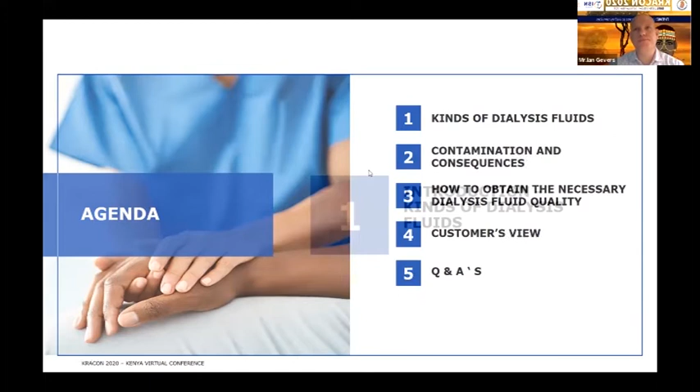In terms of kinds of dialysis fluids, I'm sure you're all very much aware of the types of water quality and water sources that we have, namely groundwater, surface water, well water, and treated water from municipalities.

What is very important to note is that in terms of groundwater, or water in general, there are many contaminants that we must refer to that are found in water sources, namely deposits of salt, gypsum, nutrients, and metals within the soils that leach in from surface and groundwater.

It's very important to understand what these contaminants are in terms of how we then need to treat water in a hemodialysis setting. There are also many factors that influence the water quality and also water sources.

These can be affected also by seasonal fluctuations, which also directly affect microbial and bacterial contaminations.

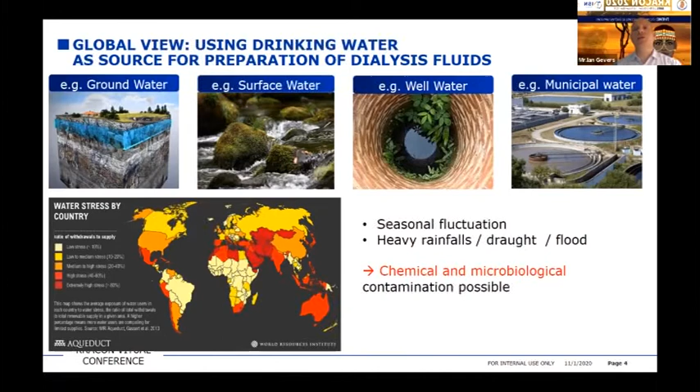What I mean by that is that water enters the water storage containers and leaves directly into the pre-treatment setting, where many contaminants are removed, which actually can be a potential threat to the RO system itself.

We then have the distribution system going to all the dialysis machines and also a concentrate preparation system.

So what's very important to understand about water is the feed water going into a water treatment system in a dialysis unit is of course the heart of it, but also needs to be a water quality that is drinkable.

From that, we can then work with our water pre-treatment system, which removes mostly particles and contaminants which are harmful for the RO membrane.

One could say that you could use an RO system with an RO membrane directly from a raw water feed system, but the risk in that is that you would then go through RO membranes on a very regular basis, and it does definitely pose a risk to dialysis.

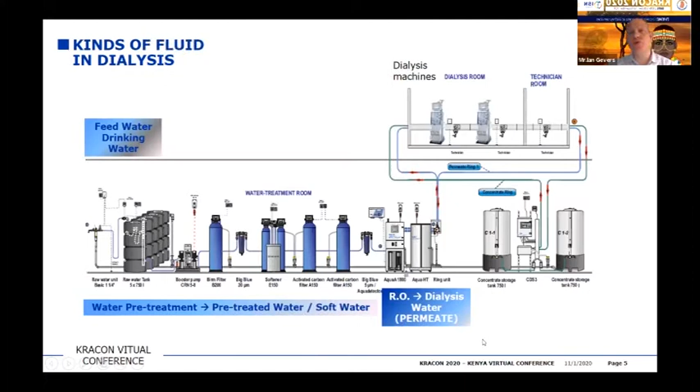We then pass the water through an RO system, and we'll go briefly into the reverse osmosis process in a short while. We refer to this water as permeate.

We then use the permeate to also potentially manufacture concentrates, which could be in the dialysis clinic setting, or they could be the concentrates which you use on a daily basis.

From there, we have dialysis fluid, ultra pure dialysis fluid, and substitution fluid. What's very important to understand is we need to have a set of standards for both microbiological and chemical contaminants.

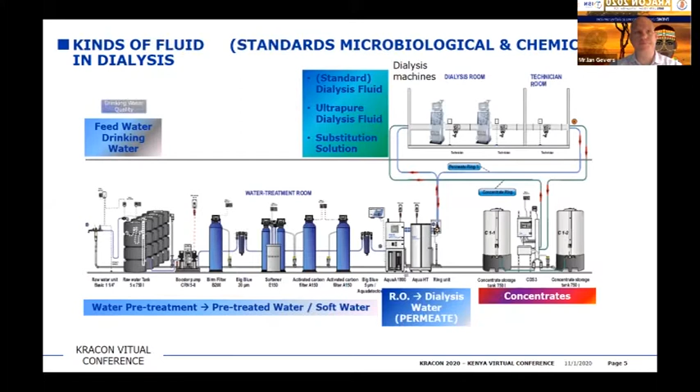So in terms of drinking water quality, what does regulate that water quality? Well, there are various different standards throughout the world. We have the World Health Organization water standards.

In South Africa, we have the South African National Standards for Water. In Kenya, there's the WASREB, the Water Services Regulatory Board, and many other standards in terms of drinking water.

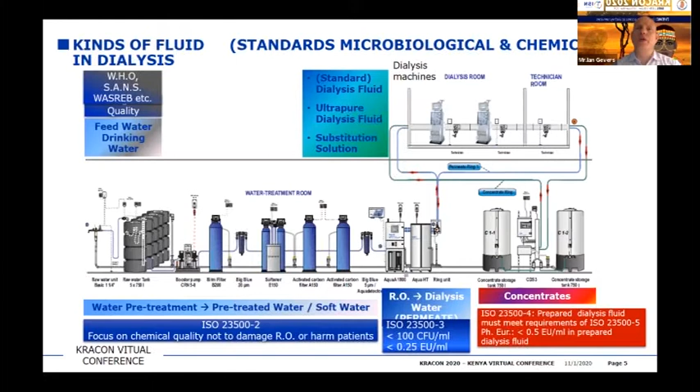However, then we move to a very, very important standard, and that's a standard that has been established over many years and has been consolidated into the ISO 23500 range of water and dialysis fluid preparation guideline.

ISO 23500-2 focuses on the chemical quality, and this is to, as I mentioned before, not harm the RO membrane or harm patients through a chemical contamination.

In terms of RO water for dialysis or permeate, we also then need to regulate the microbial loads on the patient. In other words, as Dr. Miner mentioned, less than 100 colony forming units per milliliter is our limit value, and for endotoxins, 0.25 endotoxins per milliliter.

Of course, there are other guidelines in terms of an action level. So we've got two levels of water quality: an action level and an alarm limit. The action level is what triggers the person monitoring the water system to act before we actually exceed

the alarm limits for bacterial and chemical contamination. We then have ISO 23500-4, the standard for preparation of dialysis fluids, which must meet these requirements. In terms of the European Pharmacopoeia, less than 0.5 endotoxin units per milliliter in prepared

dialysis fluids. We then move to the actual dialysis fluids themselves, regulated by ISO 23500-1 and -5, which has specific bacterial loading limits. We refer to ultra pure dialysate or ultra pure dialysis fluid, and their limits are quite a lot lower, by a factor of less than 100, so 0.1 colony forming units per milliliter, and in terms of endotoxins, 0.03 endotoxins per milliliter. So you can see the regulations are very strict and very stringent.

Moving to the next slide. If we look at a typical RO room or water treatment setup, the heart of the dialysis unit being the RO system, we generally need to break down the reverse osmosis process to understand exactly how the process works. And of course, that eventually leads into the monitoring of the system.

Reverse osmosis is a separation process that uses pressure to force a solvent through a semi-permeable membrane that retains a solute on one side and allows pure solvent to pass through to the other. The RO process uses soft water pressed against the synthetic semi-permeable membrane, which is permeable to water molecules but not impurities. Soft water is pressed with a certain pressure against the membrane, stimulating osmotic pressure. Since larger molecules cannot fit through the pore, only water molecules are pressed through the membrane, and on the other side we then have ultra pure water.

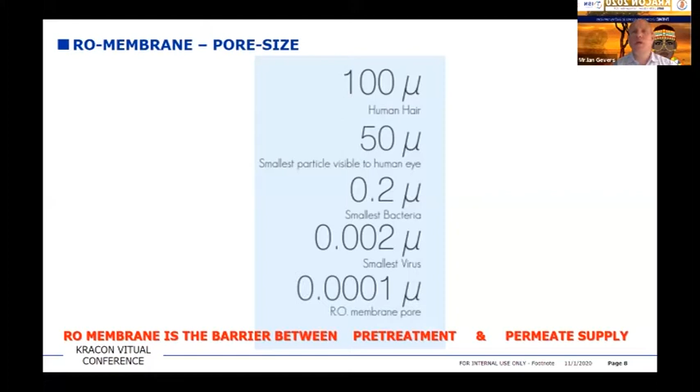So it's very important to note that the RO membrane is the barrier between pre-treatment and permeate supply. If our RO membrane is intact and well managed and maintained, and the integrity of the system is according to specification, we know that we are producing the correct water quality in the system.

However, it's also very important to realize, as I've mentioned numerous times, that monitoring of the water treatment system is an extremely important factor. To ensure the safety of the system, there should be certain monitoring parameters in place, for example daily, weekly, monthly, and annual monitoring.

This relates to the pre-treatment in daily and weekly monitoring, where we're monitoring chlorine, hardness, pressures, tank volumes, backwash of controllers, and salt levels in the softener, as well as the RO performance.

Maybe just a quick comment about chlorine. Chlorine is very harmful, resulting in hemolysis of the red blood cells in a dialysis patient, thereby dropping the HB, and this can affect an entire dialysis session. So it's critical to monitor chlorine before every dialysis session, depending on the type of pre-treatment in place. A double carbon filter would allow you to monitor chlorine before dialysis starts, and it's very important that before dialysis starts, someone with the correct knowledge and training should evaluate the system,

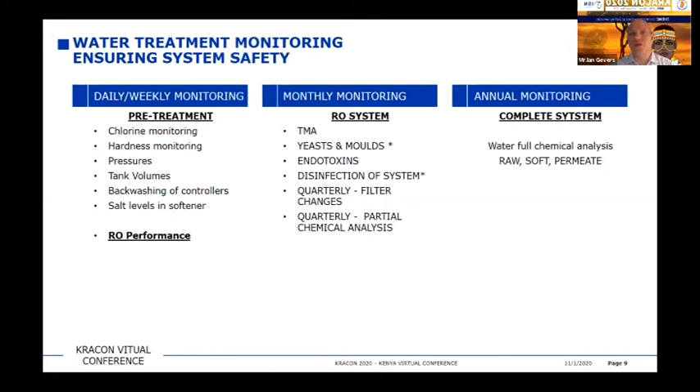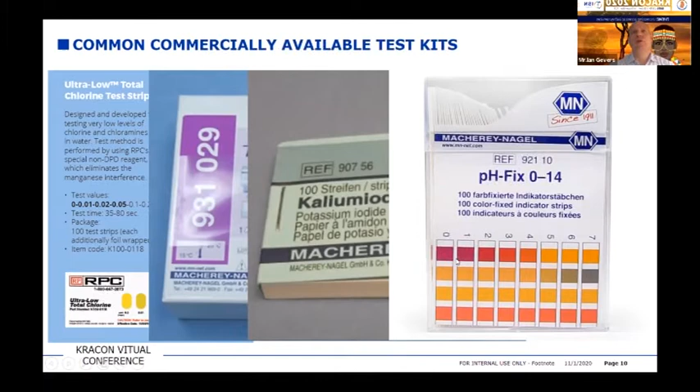So how do we do the daily monitoring of water treatment systems? There are commercially available test kits that you can use to monitor chlorine, hardness, in terms of disinfection, iodide, potassium strips, as well as monitoring pH of a system. It's critical to monitor these systems daily and have these test kits available in a dialysis clinic water treatment system, to ensure that our patients are dialyzed safely from the word go.

So we mentioned ultra pure dialysate before, and dovetailing on Dr. Miner, online HDF, what has been identified over the last 5 to 10 years, possibly even longer, is minimizing the patient's risk of cardiovascular morbidity and mortality. So despite significant improvements in the quality and efficacy of hemodialysis therapies in recent years, CVD remains the leading cause of death for dialysis patients.

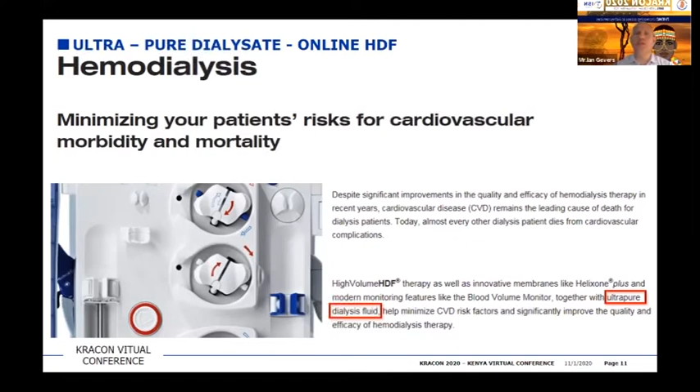Today, almost every other dialysis patient dies from cardiovascular complications, and it's very important then to make use of ultra pure dialysate fluid with features on devices such as blood volume monitoring, in order to help minimize cardiovascular disease risk factors and significantly improve the quality and efficacy of hemodialysis therapies.

So why ultra pure dialysate fluid? Well, patients treated with ultra pure or ultra filtered dialysis fluid have demonstrated a decrease in serum beta-2 microglobulin concentrations, a decrease in markers of an inflammatory response and oxidant stress, and an increase in responsiveness to erythropoietin.

In long-term studies, the use of ultra-filtered dialysis fluids have been associated with a decrease in incidence of beta-2 microglobulin associated amyloidosis, better preservation of residual renal function, and improved nutritional status, which Dr. Tuahir commented on quite a lot, as well as Dr. Miner. These observations have led to the recommendation that dialysis fluid of higher microbiological quality, so-called ultra-pure dialysis fluid, should be used for routine hemodialysis.

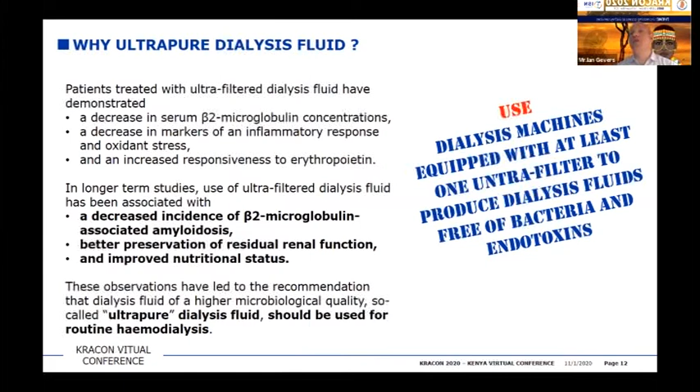The use of hemodialysis machines, therefore, should at least be equipped with one ultrafilter to produce these dialysis fluids free of bacteria and endotoxins.

Additionally, in terms of online hemodiafiltration, online prepared sterile and non-pyrogenic fluids is required, especially due to the direct infusion of high volumes of fluid into the patient's bloodstream. Therefore, it is of particular importance to ensure that no contaminants, chemical, bacterial, or otherwise, may occur in dialysis fluids.

So if we have a look at the contaminants and consequences associated with pre-treatment and dialysis water, from a chemical perspective, with pre-treatment we're removing certain parameters to protect the integrity of our RO membrane, which is the barrier between our water supply system and our patient's dialysis water quality.

And then from a dialysis water quality or reverse osmosis system, other contaminants are in the blue categories. I'm not going to go through each and every single contaminant, as that would take a very long time, but we can mention a few which have specifically been documented with toxicity in dialysis, those in red or orange: aluminium, fluorides, lead, nitrates, nitrites, sulfates, and zinc.

But generally, of course, we need to remove or control all contaminants to a very specific level of quality associated with the ISO 23500 water standard.

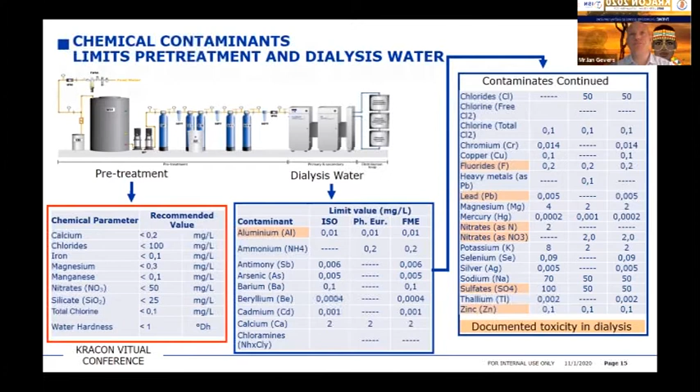Coming then to the bacteriological contaminants, if we look at total bacteria or plate count, you can typically see the growth on a media to indicate the growth rates and bacteria present in water.

What is a very interesting point to mention at this point is that growing bacteria on plate counts can also identify yeast and molds. By identifying yeast and molds on the same plate count, it can then be determined whether one should or should not perform yeast and molds as a diagnostic test rather than on a monthly test. We also then have endotoxins as a contamination.

And all of these contaminants left untreated in a water treatment system can lead to growth of biofilm. Biofilm is, fancy words aside, a polysaccharide or specific structure that occurs within a pipeline distribution system within a water treatment system. But basically what we're looking at is a slime that forms within a pipeline where bacteria adheres to the inner walls of the pipeline.

This proliferates and grows and eventually forms a protective mucus around the bacterial growth on the inner lines of the pipes, which can then lead to, after disinfection, a dispersal. This immediately creates a risk for a patient because those dispersals or break-offs can then go directly into the dialysis machine, posing an immediate risk of biological contamination to the patient.

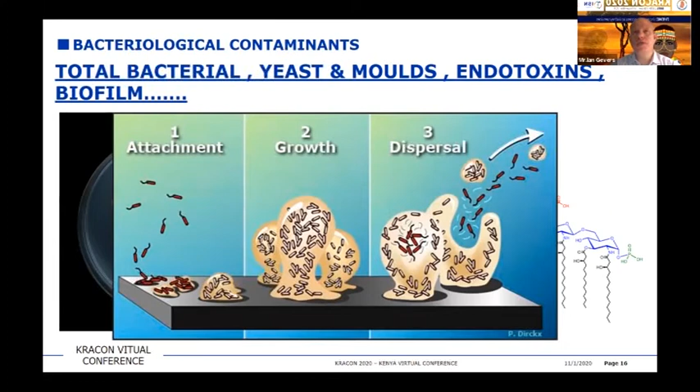So if we break down what endotoxins are, they're basically found in the wall lining of a gram-negative bacteria. It's a lipopolysaccharide protein complex. They are often released during the proliferation, lysis, or breakdown of the bacteria found within a dialysis water treatment system. And the risk here is that smaller parts may pass a dialyzer membrane and cause reactions to patients, specifically the lipid A string of the bacteria or endotoxin.

So how do we test for bacteria? How do we test for endotoxins? Well, typically we have laboratories available throughout the world. Of course, there are laboratories in Kenya, South Africa, and neighboring countries which perform these tests. And this is the most common practice, but it does have lengthy time delays, specifically related to endotoxins.

The standard test procedure for a typical plate count is 7 days. However, one can have a preliminary result within 2 to 3 days, which does give an indication of whether bacteria is proliferating or not.

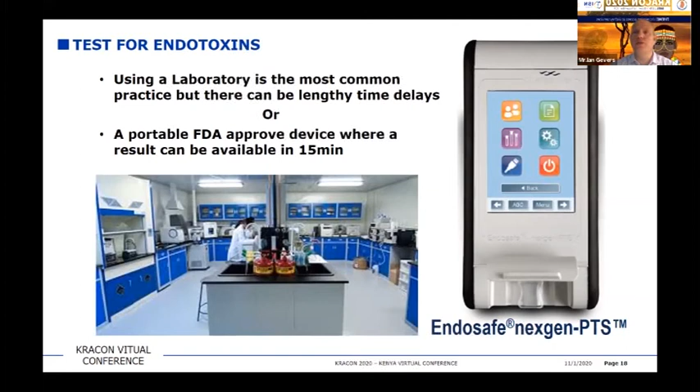The other method for testing endotoxins is a portable FDA-approved device where you can actually get your endotoxin results within 15 minutes. These systems are available through various different suppliers. In South Africa, we specifically use the Endosafe nexgen-PTS device, and it's definitely an opportunity worth investigating.

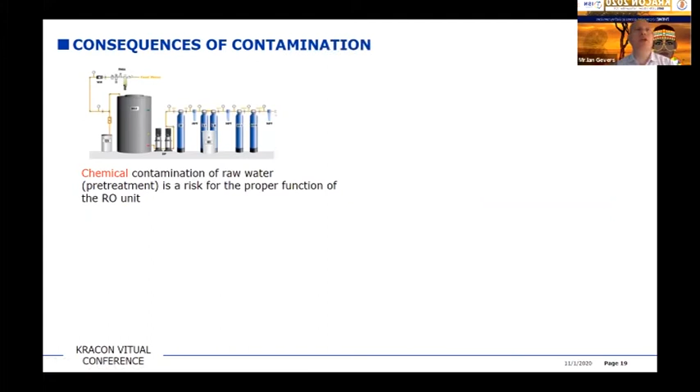So consequences of contamination - I think Dr. Miner mentioned this very briefly, but let's go into it in a little bit more detail.

The most risky elements in terms of our pre-treatment system are the chlorine, nitrates, calcium, and magnesium. And typically what happens here is that, as we mentioned before, the RO membrane is the barrier between pre-treatment and the patient, or the permeate supply. So what happens is the RO membrane will block most of the contaminants, bar chlorine.

Chlorine does move through the RO membrane, and that is why it's critical to remove chlorine before the RO membranes through carbon filtration, as an example. If not, it damages the RO membranes. And the risk here is that we have passages of substances where these contaminants can then move directly through the RO membrane.

A softener is also very important regarding the protection of the RO membrane. If we do not have a softener which removes calcium and magnesium through an ion exchange process, we can actually block up our membranes, which can result in a rupture of the membrane.

From a chemical and microbial contamination risk in dialysis fluids, there are, of course, acute and chronic adverse effects. When we speak about different contaminants such as nitrates and chlorine, this can cause hemolysis. Bacteria results in a biofilm formation in the system. This can increase the endotoxin concentration. An example of this would be after a membrane rupture, thus leading to sepsis in a dialysis patient.

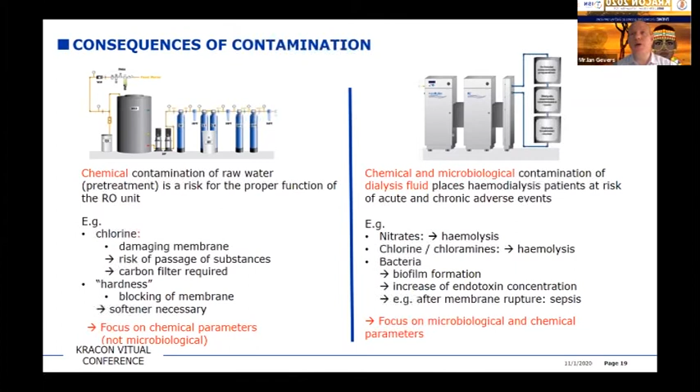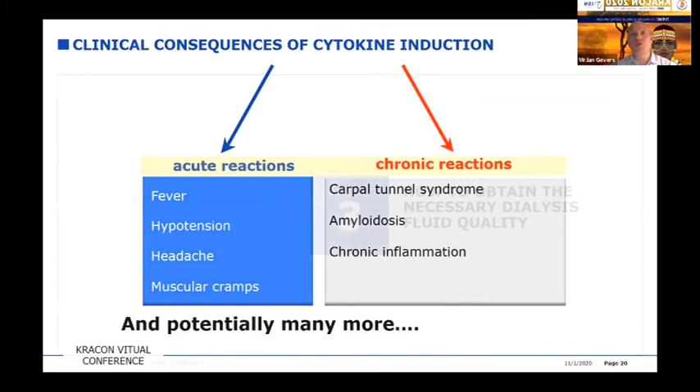Of course, we could spend probably a day going into the amount of reactions in a patient, but let's focus on how we can manage the system and therefore create an online substitution fluid of the correct quality.

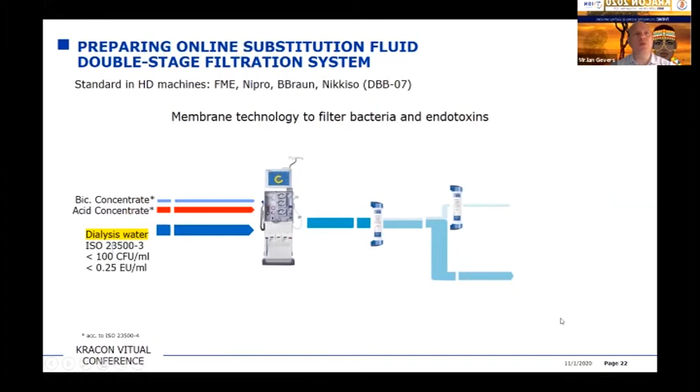So if we have a look at a typical dialysis machine, most dialysis machines these days do have an ultra pure bacterial filter in place. And if we look at the fluids that actually come into a dialysis machine, we've got the concentrates as well as the dialysis water with a very specific quality, as we've already identified.

The machine mixes these fluids and results in a standard dialysis fluid, which we would use for a treatment, typically hemodialysis or hemofiltration, etc. Here we've got also a very specific standard in terms of bacteria limits.

And then in terms of creating ultra-pure dialysis fluid, we should pass our dialysate through an ultra-fine or ultra-pure filter. This results in a bacterial count of less than 0.1 colony forming units per milliliter, and 0.03 endotoxin units per milliliter. The idea behind an ultra-pure filter is that it has a property of 99% rejection or retention of bacteria and endotoxins.

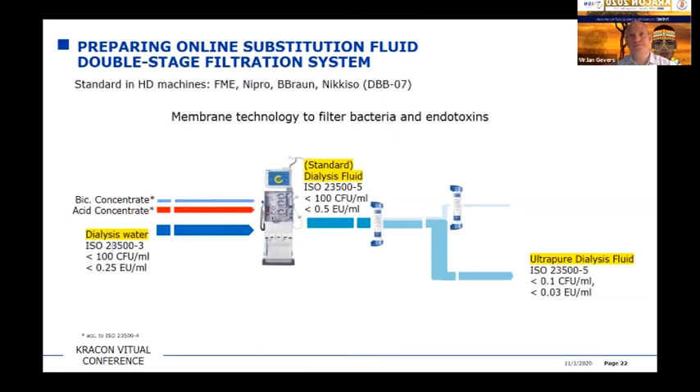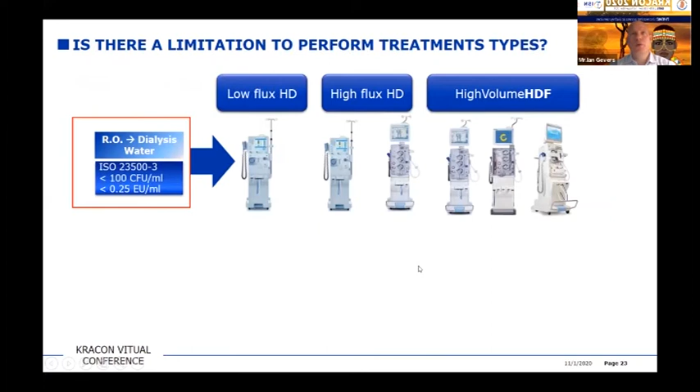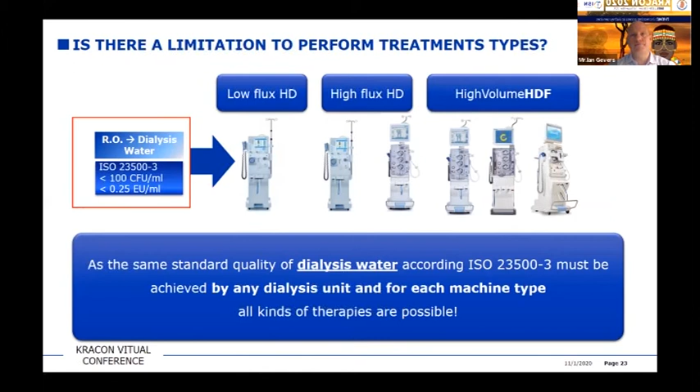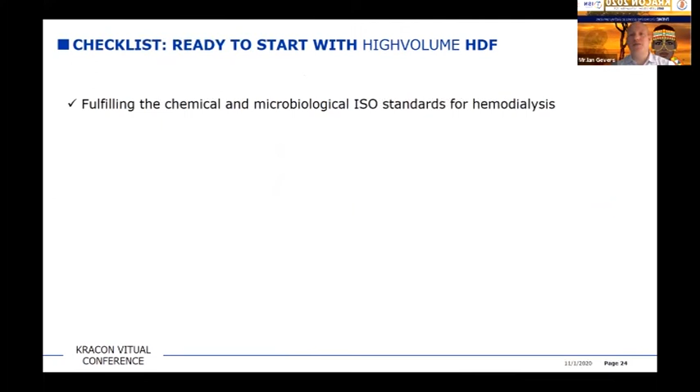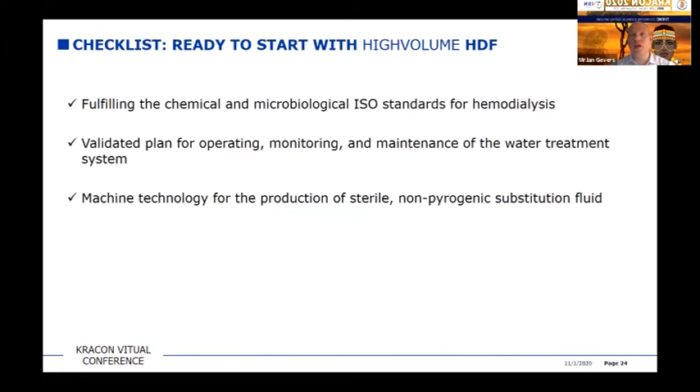So are we ready for hemodiafiltration yet? Well, we have to fulfill the chemical and microbial ISO standards for hemodialysis. We have to have a validation plan for operating, monitoring, and maintaining water treatment systems. And we have to maintain the technology for the production of sterile, non-pyrogenic substitution fluid.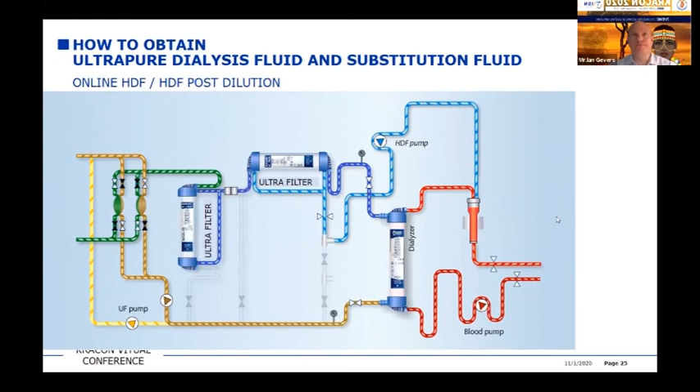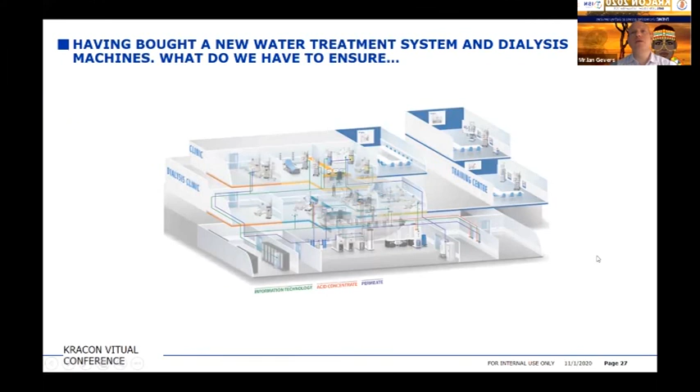So if we break it down and have a look at it in terms of the customer's view, let's assume we placed a completely new water treatment system at the site of a dialysis clinic. We can then look at what's important for the customer to have as a support structure: technical availability, chemical quality, microbial quality, and of course regulatory compliance in terms of ensuring patient safety.

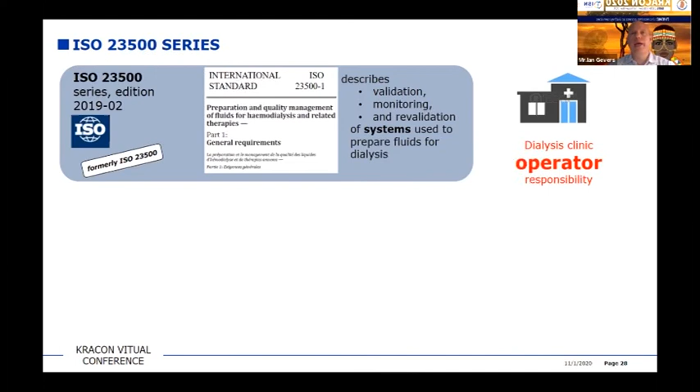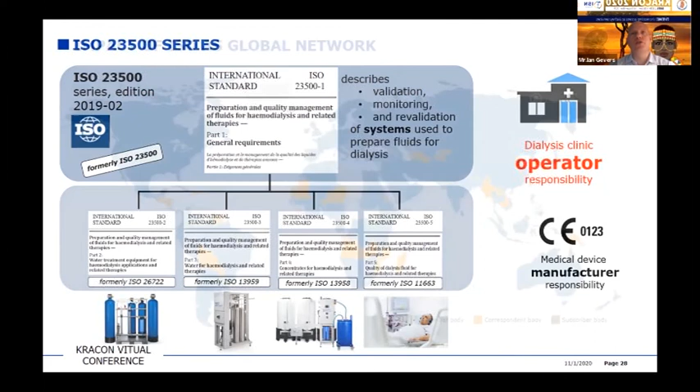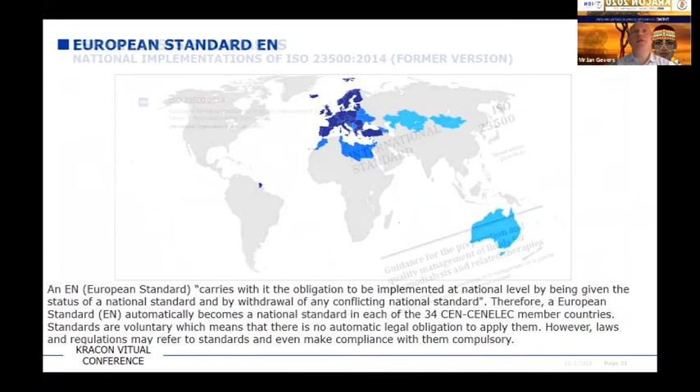In terms of identifying responsibilities in the different systems, it's important to understand that the operator in the dialysis clinic has a function to monitor the systems. In terms of design, the manufacturer has a responsibility to ensure these devices are manufactured according to standards. The impact of ISO is based on a global network, as well as European standards, and all the standards set out for dialysis have been concluded and summarized in the ISO 23500 standard.

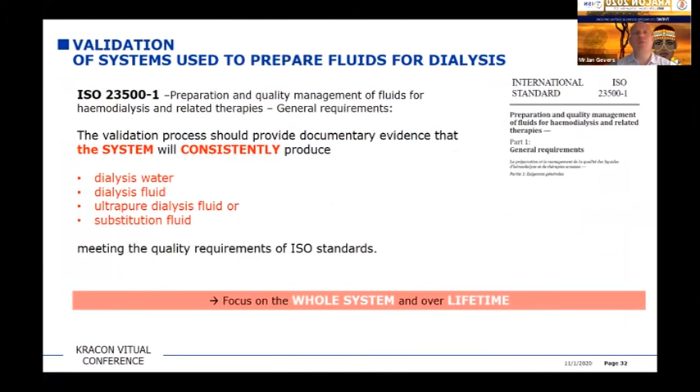Moving on to validation of the system, there must be a plan in place. We must focus on the whole system over the lifetime of the device to ensure correct quality and meet the correct standards. The validation and surveillance of the system is very important, and there are different qualification processes that must be in place for the manufacturer as well as for the user.

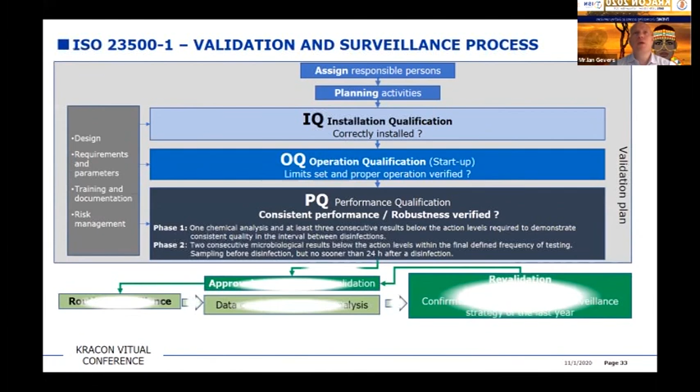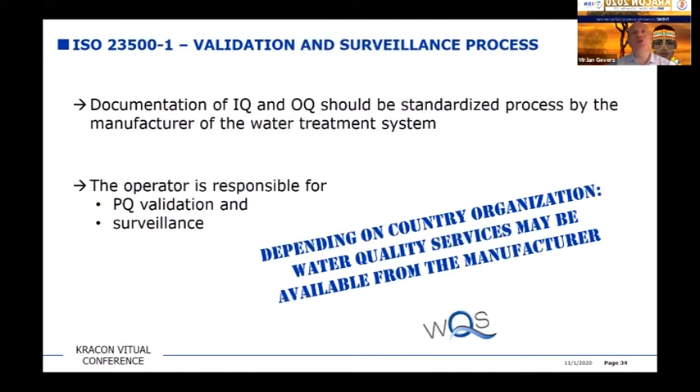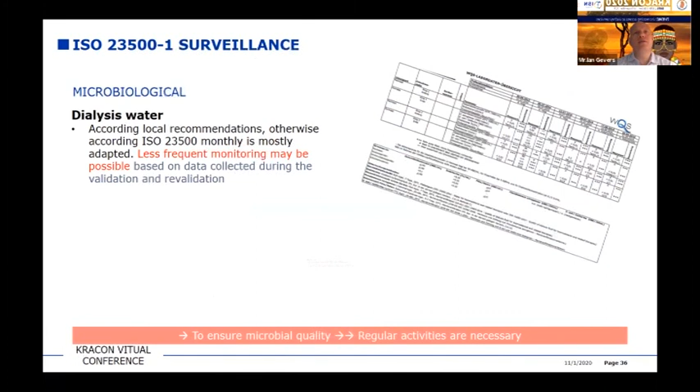It's very important to have a surveillance system with monthly performance monitoring, and your water treatment supplier can assist you with putting a plan in place. In terms of validation, it's important to have operational qualification, microbial qualification, as well as chemical qualification processes in place.

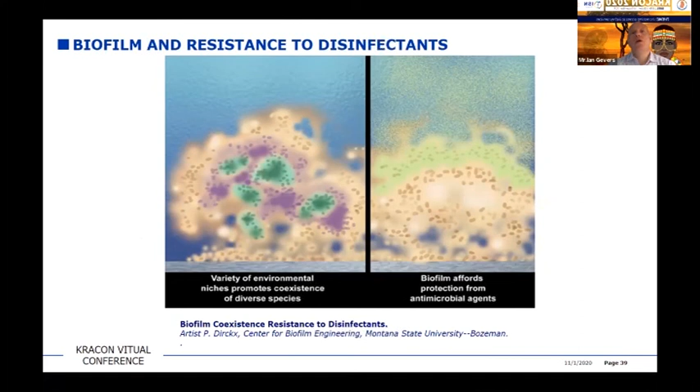Coming to the last and a very important strategy of a water treatment system, biofilm is a clear risk for dialysis contamination after the RO membrane, and biofilms can become resistant to disinfectants. So it's important to control it before it actually forms.

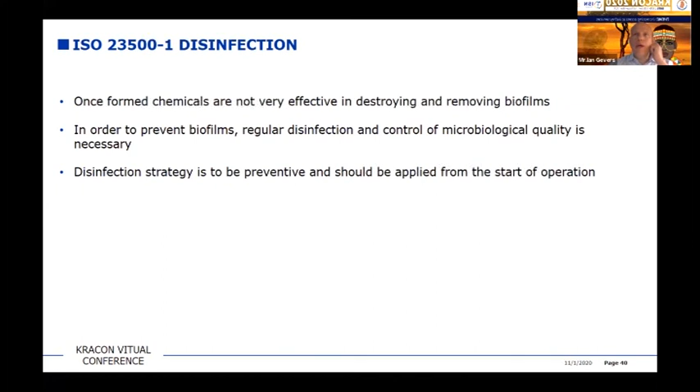If we look at the disinfection strategy of a water treatment system, it must be regular to control bacterial contamination. A disinfection strategy should be preventative rather than reactive.

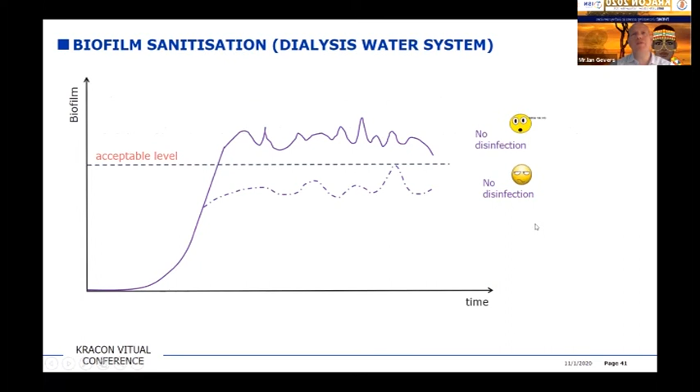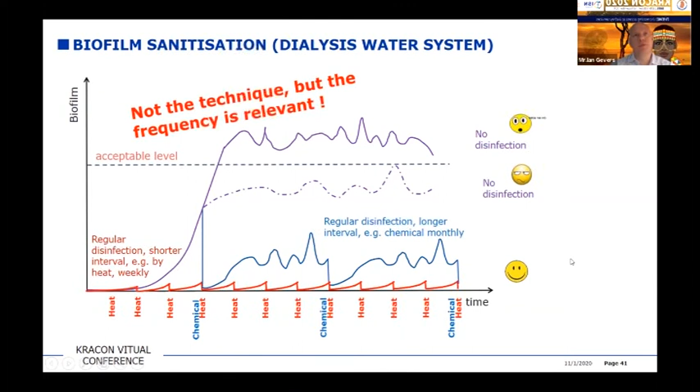How can we define this graphically? Biofilm grows over time. If we don't perform disinfections, we have steady growth, eventually logarithmic growth of bacteria above acceptable levels. However, with a standard regular disinfection process in place, for example monthly, we can control the proliferation of bacteria and biofilm. And with a heat disinfection system in place on a weekly basis, it provides further and more accurate control of bacterial contamination. So it's not so much the technique, but rather the frequency that is relevant.

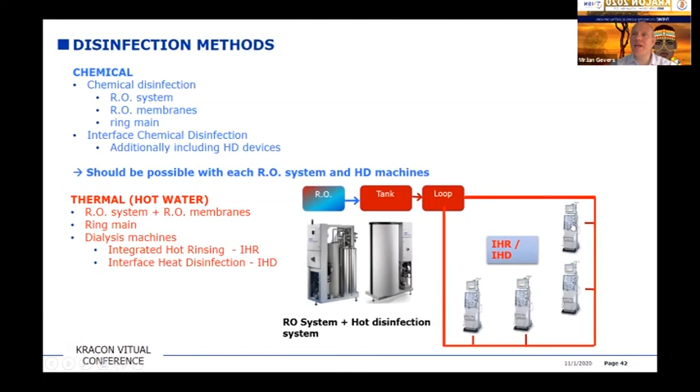Our disinfection methods can relate to the RO system, the RO membranes, as well as the ring main. It's also important to understand the risk on the water inlet circuits of dialysis machines, which are often not disinfected. So it's important that your disinfection systems include the piping systems that go to the dialysis machine from the ring main or pipeline.

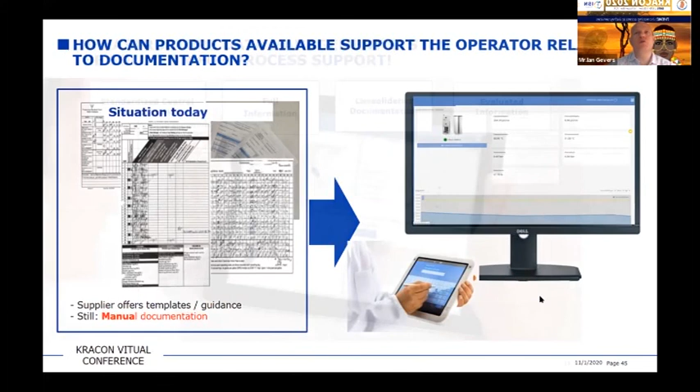So quality control is of paramount importance. Is it complicated? Not really. From your local suppliers, you can get local support in terms of looking after the monitoring of the system. At the moment, system monitoring is very much related to a manual paperwork system. However, this can be automated through electronic systems available from suppliers to standardize documentation, summarize it, and have it uploaded automatically for a consolidated view through a software system.

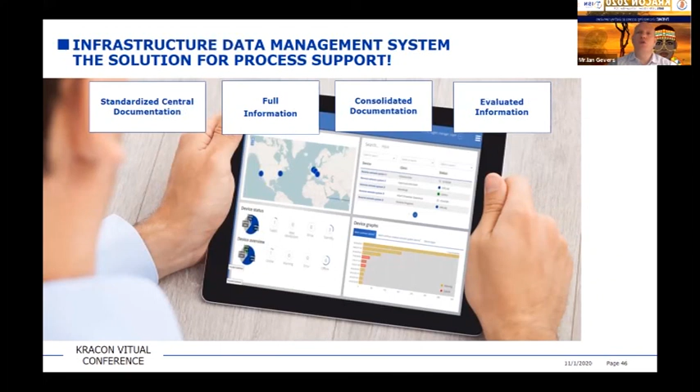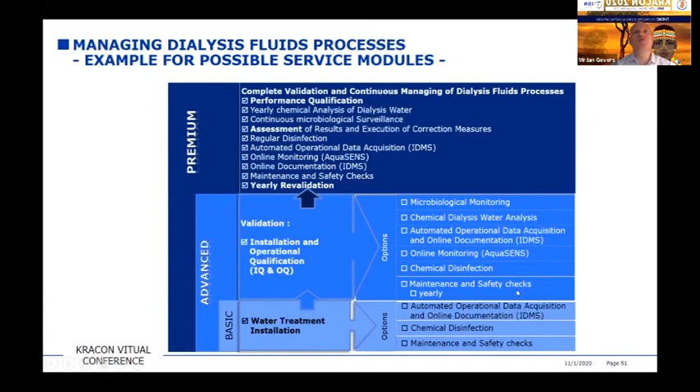My last slide leads to the different structures available from your water supplier to assist you with monitoring your water treatment system and the planning thereof. These relate to various different support services, from basic to advanced to premium, from a maintenance and monitoring perspective. So we can have a very low level or a very high level of support structures in place.